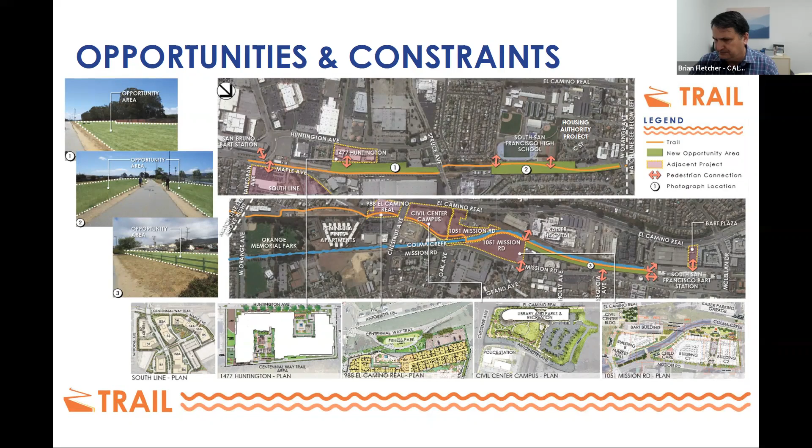We reached out to the community with these new spaces, these new opportunity areas. It opened up potential for amenities that were not available or not a potential early on. So we wanted to use images like this and get feedback from the community on what they actually wanted to see, and the input then was turned into some concept plans that I'm going to walk you through right now.

Now, you guys are the BPAC, so I'll make sure I'm highlighting the pedestrian and bike connections, because that's an important component of this. So I'm going to focus on what we call 3 key opportunity areas, and these are where the path and the new areas are the largest.

The first piece of land is between Tanforan and Spruce Avenue, highlighted in green right here. The next piece that was opened up to us is by South San Francisco High School. And the third and final piece is along Colma Creek, running parallel with Mission Road. So I'll focus today on those 3 areas - the master plan will cover the entire length in much more detail as we move forward.

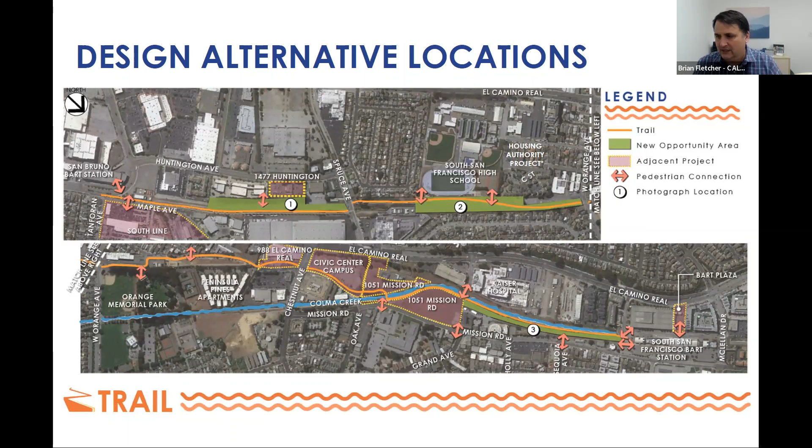So we presented these alternatives, and you'll see alternative 1, alternative number 2 for each of those 3 zones. For this one, this is the first area - Tanforan is off to the left, Spruce Avenue is to the right.

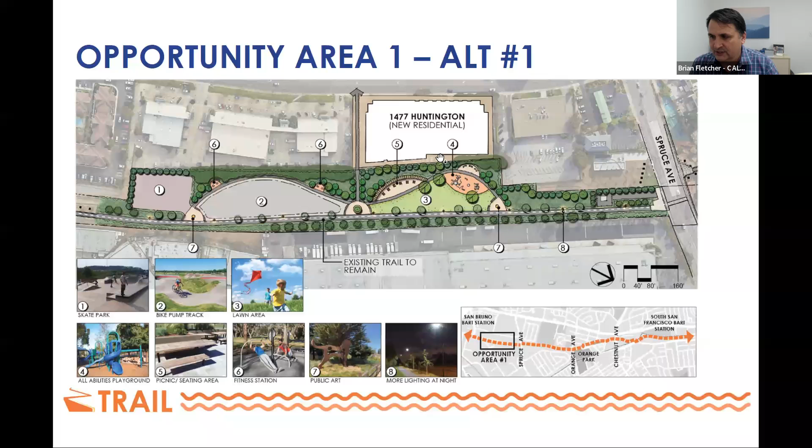Because of the width here, it opened up opportunities for different amenities. In this case, it was pump track, skate park, and then more traditional park elements like picnic areas and open turf, which would be more associated with the new development happening at 1477 Huntington. That's a new development project going in. The next alternative has a little bit of variation, going for different ball fields and such.

But let's talk about bike and pedestrian connections. You can see the trail itself is this gray dashed line with white dashes down on the lower part of the property. That's existing out there today. The new connection we're looking at is that the new development is planning a pedestrian connection that runs from Huntington to their property line. So the new master plan needs to address that and continue it all the way to the trail. Now we've opened up great new connectivity between Huntington Avenue and other proposed developments up there, connecting to the trail itself.

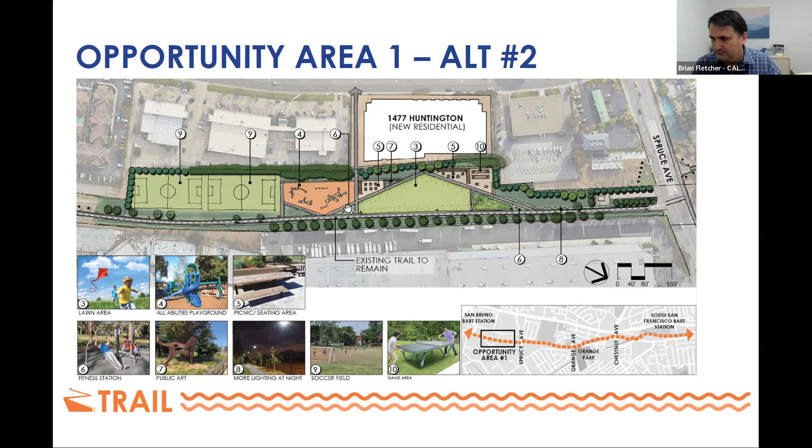It shows a pump track location, skate park, and some additional amenities within that zone. As with multiple alternatives like this, when we're getting feedback from the community, we're not saying we're going to go with alternative 1 or alternative 2. We're asking what people like best about each, so that when we present the preferred master plan, it ends up being a combination of both alternatives.

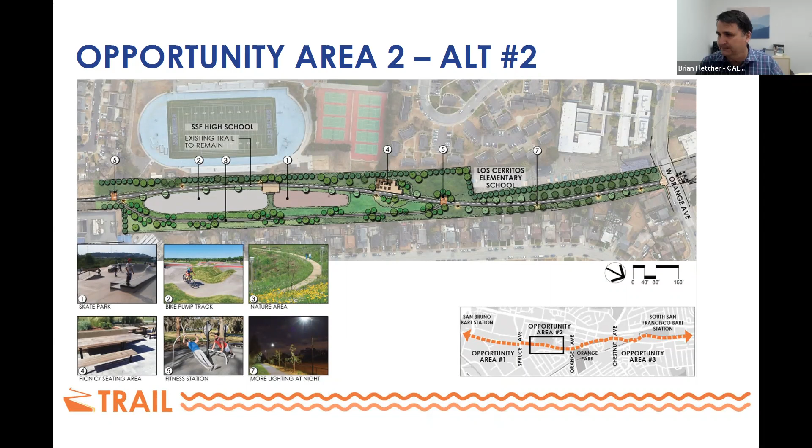Finally, moving on to area 3. I have Mission Road at the bottom here, South San Francisco's BART station on the right-hand side of the page, and Colma Creek is this blue area. The existing trail, as you're aware, runs right parallel to Colma Creek - that's the gray line with the white dashes here.

There are some new exciting opportunities being explored. Kaiser is considering a pedestrian bridge that would cross from the campus, and they're currently master planning new campus improvements that would provide connectivity for workers, not only to get to work but also during lunch hours, as well as for community members on the other side of El Camino to access the trail.

You can see this location, and even down here, we want to encourage additional connectivity from the trail to Mission Road through potential development parcels. So we want to highlight opportunity zones, as well as look at Sequoia Avenue or Sequoia Lane for pedestrian connectivity from Mission Road at the Sequoia Lane intersection over to the trail itself.

Again, just some slight variations in design and amenities. This one indicates a community garden and another, smaller dog park, since there's new residential development happening in this area, so that would be a good amenity for this zone. The other approach is slightly more natural, removing the community garden but adding what they call skate spaces - small skate plazas along the way, so there'd be smaller skate elements along the entire corridor.

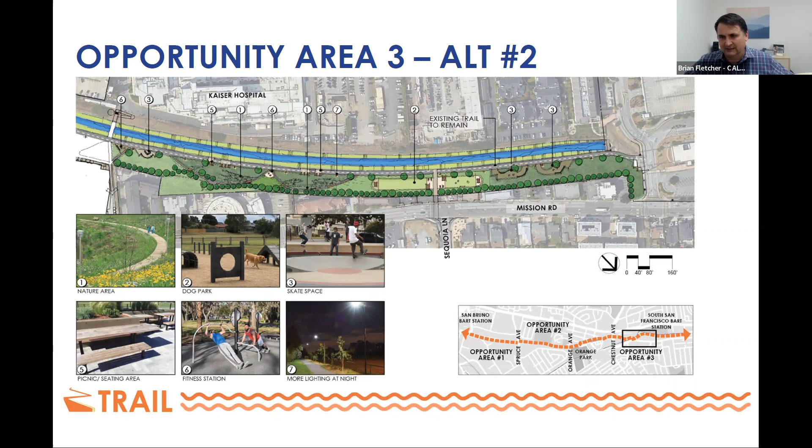So that was Centennial Way. If you'd like, I can go through Orange Park, and then we can follow up with questions and answers so I can conclude my part, if that works for everyone.

Okay, so Orange Memorial Park, similarly - what's the history? The previous master plan was done back in 2007. Why are we doing a master plan now?

There were some areas here - Cal Water actually owns this property that I'm drawing a circle around with my cursor. Back in 2007, there was great momentum for an agreement between the city and Cal Water, either a purchase or use agreement, to expand park amenities there. That's kind of slowed down and may not happen, so the new master plan should address what would happen if that land wasn't available and how the plan would be adjusted.

And as you know, if you go by the site right now, this portion of the park is actually dug up - that's a stormwater treatment and reuse facility that is under construction there.

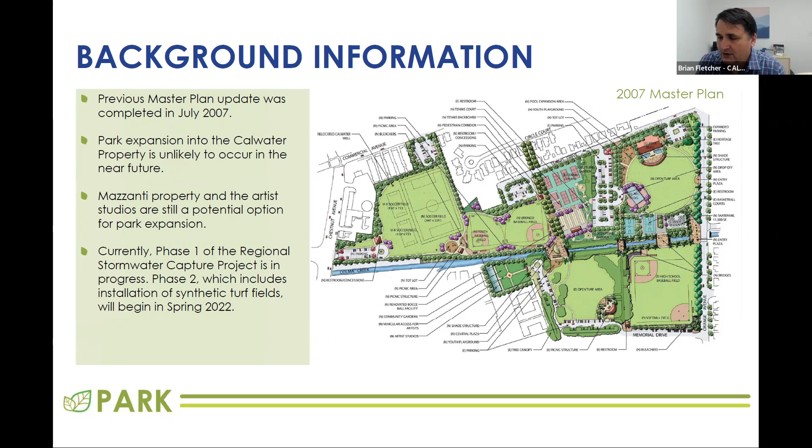That's going to provide opportunities for water to actually be diverted from Colma Creek and then used for irrigation in the park and also on Centennial Way, and to address new thoughts from the community. So again, we wanted to reach out and engage the community.

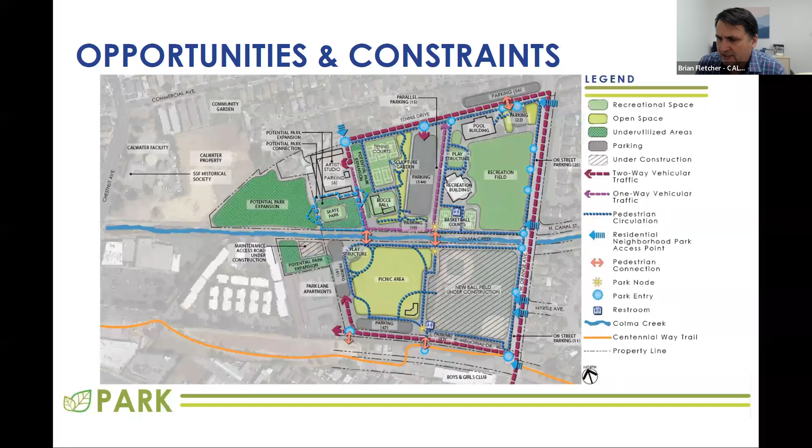We developed opportunities and constraints diagrams, circulation, and use zones. We showed them a whole bunch of imagery on what sort of amenities could go into the park that currently aren't there, and had them respond to it. We came up with two alternatives to present to them.

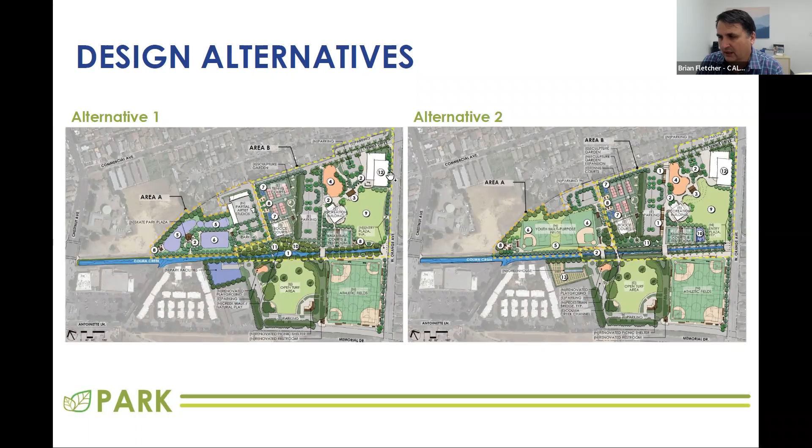Both alternatives no longer show that Cal Water property as a park expansion. Both show the proposed new synthetic turf fields going on top of the water treatment project currently underway. And both concepts show a proposed new location for a swim center the city is looking at, at the intersection of Orange and Tennis Drive.

So what are the differences? Let's take a quick look. It's pretty much the same south of Colma Creek. Half of that is the new fields going in. The other half, as part of the master plan, is an update and renovation of picnic areas and play areas. There's a minor difference.

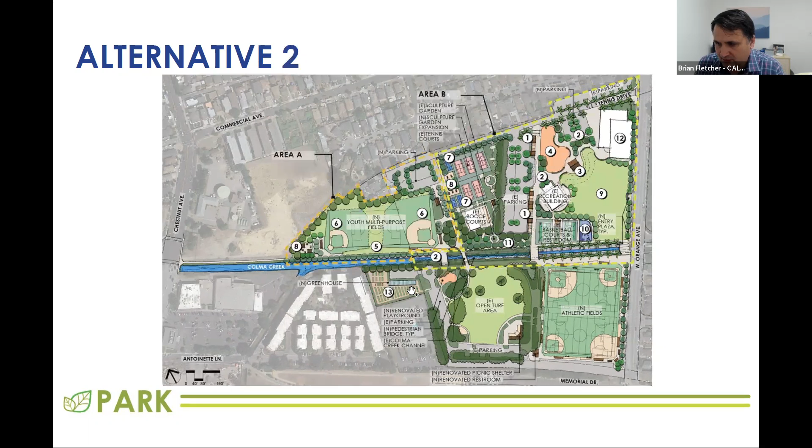One shows some park facilities in this little area, and the other shows a greenhouse and community garden. The main difference is in this area here, where the Cal Water property was or is, near Chestnut Avenue and Commercial Avenue.

So we showed two alternatives. One would be a skate park and pump track, the other was fields. To highlight the connectivity, in both alternatives we're proposing a pedestrian and bike connection from Chestnut Avenue all the way into the park, running parallel with Colma Creek, which isn't there currently. That's going to dramatically improve connections for the community from the new Civic campus and from Mission Road all the way into Orange Park, which wasn't there before.

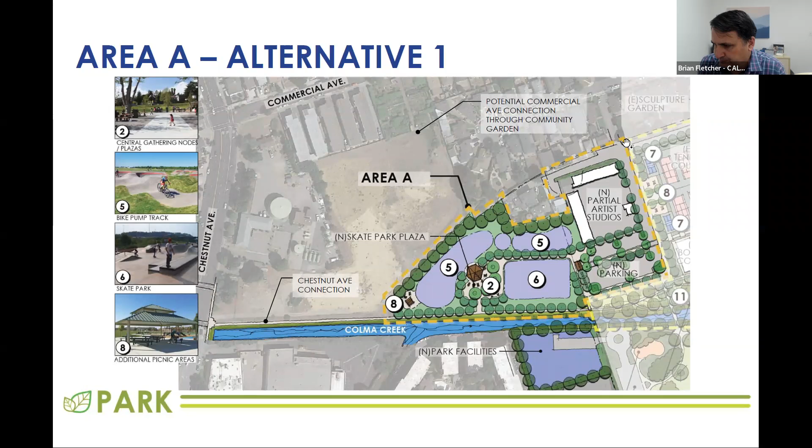The other alternative shows multi-purpose fields. Then when we get to these areas, Orange Avenue, Tennis Drive, and the existing tennis courts, we're looking at adding amenities like pickleball courts in these locations. We're looking at renovating the existing play area to be more universally accessible, and at modifications when the existing swim center gets demolished.

We're also exploring opportunities along the creek itself for renovation, going from the old-school concrete-lined channel to actually removing some of that concrete and restoring it to a more naturalized creek. That would provide additional pedestrian and bike connections within the park in a much more natural environment. So that's what this alternative shows.

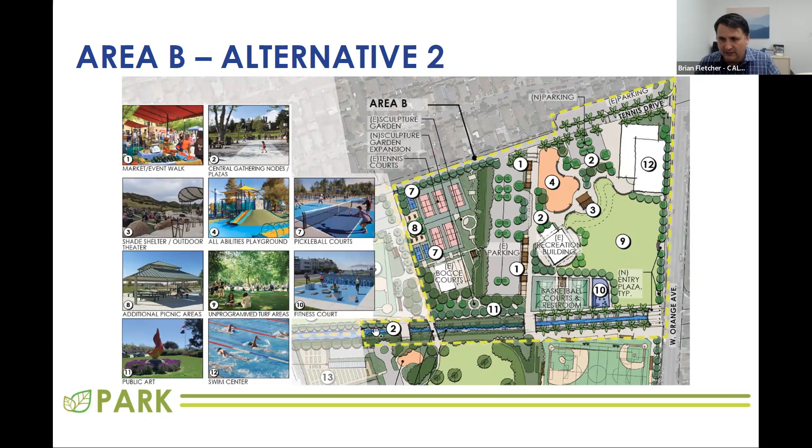The second alternative is pretty similar, except it retains the existing alignment of Colma Creek as channelized, but still looks for opportunities for improved connectivity across Colma Creek itself.

So where are we in the process? We've gone through our initial outreach, program development, and the initial review of these alternatives with the community, as well as the Park and Recreation Commission. We're here tonight to get your input. We're currently drafting the initial master plan, and we'll bring that back to the commissions, refine it, and then go to council, hopefully in spring, with a draft final master plan for review.

So with that, I'll stop sharing my screen and open it up to some questions.

Since we are building more apartments, I really appreciate that we're considering adding more green spaces. If I had a suggestion, it's to make sure that along the trail we try to leave it open for as much recreation as possible. If I had my druthers, I'd prefer open green spaces connected with a bike and walking trail, and also like one of the examples had a soccer field. That would be a great use of the space, given that we're doing high density building and green spaces are limited in the city overall.

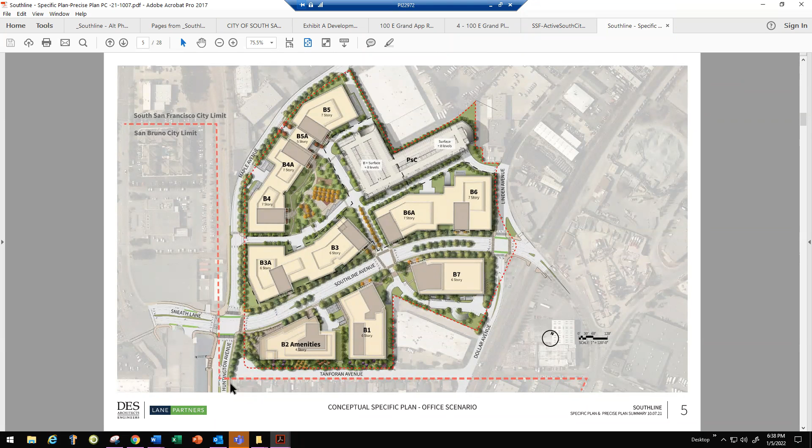So here is the Southline project - I think, Josh, what you were talking about was this area down here, Maple and Huntington. There would be some upgrades there. The applicant for Southline would definitely be focusing on some pedestrian and bike improvements down at that area, but there's not really space for the recreational amenities, such as in the ideas that Callander was sharing.

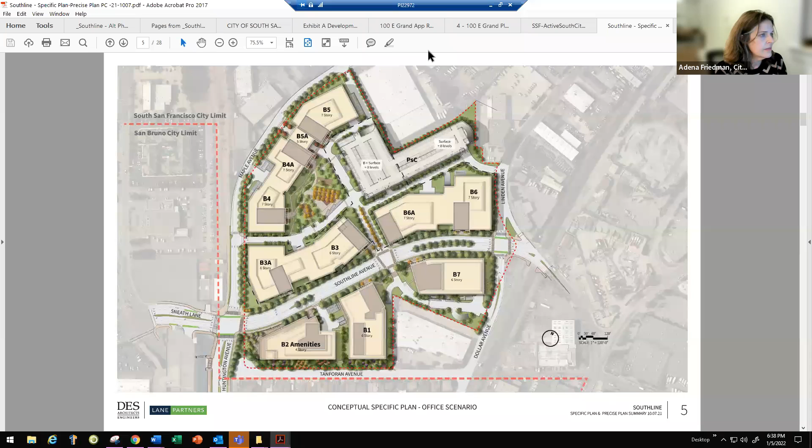Thank you. How is cost a factor in deciding, like, option 1 versus 2 versus 3? Or is it not a big deal - are they roughly the same budget anyhow?

Well, the reality is there isn't money to construct any of this. These are forward-thinking master plans that identify what the community and decision makers want to do - it's a visionary project.

I think what's great about this, and why it's important to do even without the money, is that when developers come in, there's a plan they can work towards, implementing connectivity within their own site. As Adena mentioned, there's also opportunities for developers to actually develop some of these trail improvements themselves. So even though we don't have the budget to build it, it's important to have it to then pick away at this.

And just like the first master plan, that generated two or three different grants that made that project a reality. So that's what's really important.

As far as the cost of either one, we haven't compared the two for that particular reason. We're just trying to identify a vision, but they're all pretty comparable.